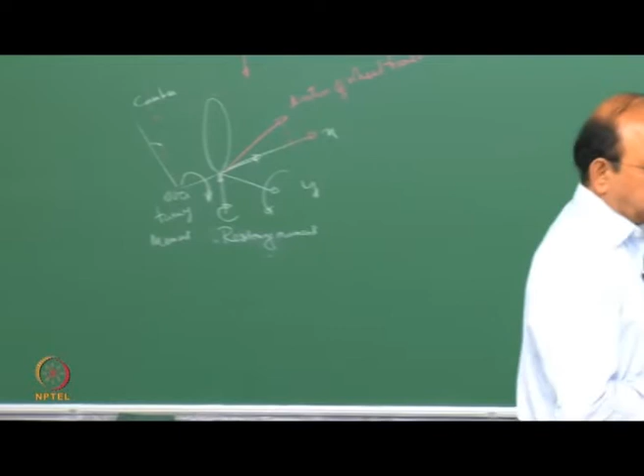In the last class, we were looking at the tractor trailer, and we were looking at braking. We also looked at how braking affects the performance, as well as the braking distances, and we saw how when a tire is locked, whether the front gets locked or the rear gets locked or the trailer gets locked, how that is going to have an effect on the vehicle motion. So we also gave a sequence on how it should be locked, and the braking forces or the percentage of braking forces which are distributed would depend upon the weights that are acting, as well as on this sequence which we said should take place. Without delving much into that tractor trailer, you have done some assignments, so that will give you an idea.

We will now move over to a very important and interesting topic on tires. So we will understand what are tires, and then we will go ahead and understand the mechanics of tires.

Mechanics of tires is a very interesting topic as well as a difficult topic. Though one would say, what is in a tire, I see this every day in every car. What's so important about tires? If you look at an automobile, there are two components which are extremely abused to the greatest extent. One is the tire, the other is the piston rings. Both of them are abused in the sense that they are subjected to all sorts of loads, friction, and so on in their lifetime.

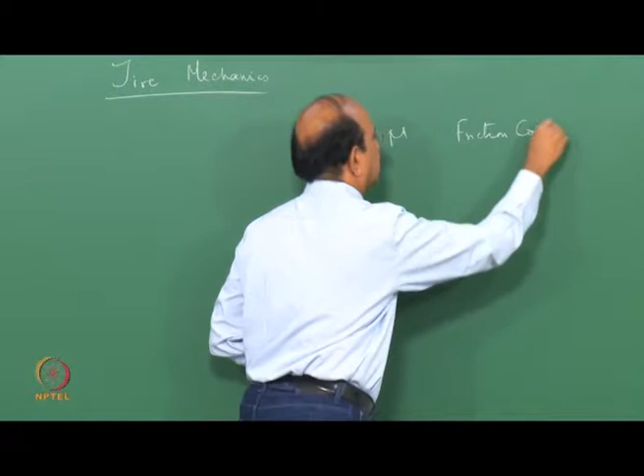In the last class, we said that we will dump all the effects that happen between the tire and the road into one constant, and we call this mu, and we said that this is the friction constant or friction coefficient. I put that within inverted commas, friction coefficient, because it is not as simple as what this equation says or what happens in just a block. So friction coefficient is only a simple equation to depict the relationship between the forces, but the phenomena is very deep.

We will answer the question one by one, as to why or how this friction coefficient or friction is developed, and how it enhances the grip, and so on.

Now, before we go further, let us look at just the forces that are acting on the tire. Since all of you know, you have done a course on automotive systems, you know what is a tire and so on. I'm not going to delve too deeply into the specs of the tire and so on, but we will maybe indicate this as we go along. We will not go into the construction of the tire and other aspects of materials, but we will suffice it to understand whatever is required. We will do that right now.

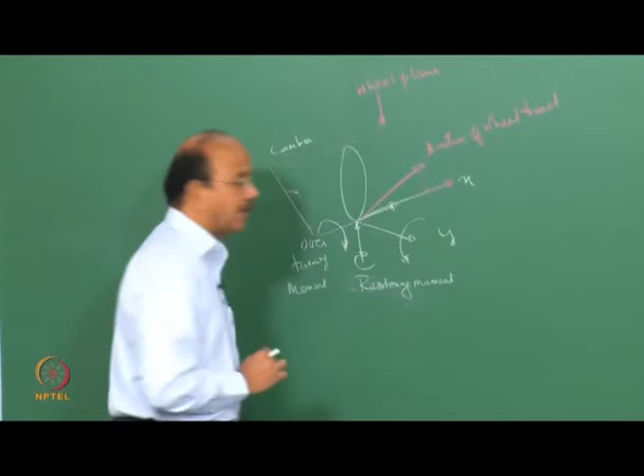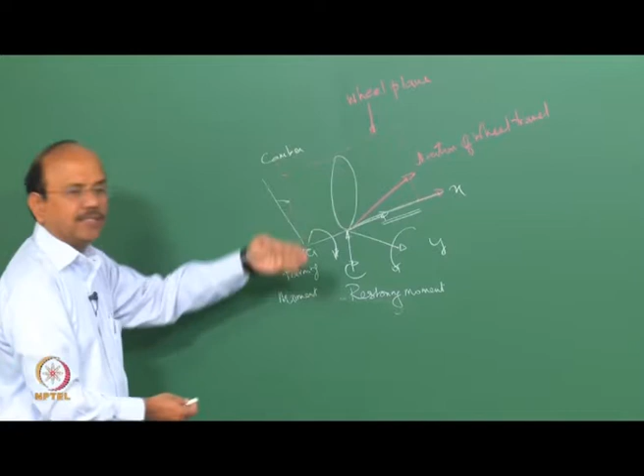So first, let us look at the forces that act on the tire. There is a longitudinal force, which is in the x direction, but that force is exactly not along the wheel plane. Suppose this is the wheel plane, then you would see that the tire direction of rolling or the travel is not exactly along that direction, but is at an angle, say let's call this lambda or alpha, and that angle is what is called the slip angle.

Why is it so? We will see that in a couple of lectures.

So the first thing is that it's very interesting to note that the tire, as it travels, doesn't go along the plane. Let's say that x direction is the direction perpendicular to the normal, or normal to the wheel plane. So in other words, the tire does not travel along the wheel plane. It takes a direction, and that is what I call the direction of wheel travel, and that direction is at an angle of alpha, or lambda, which is called the slip angle.

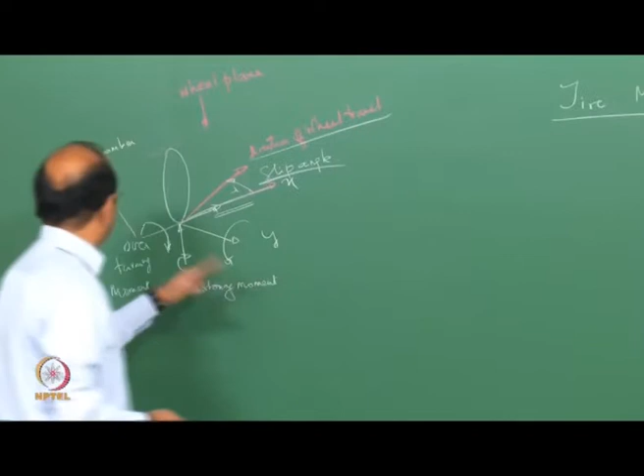That's the first thing. There are a number of forces, as well as moments, that act on the tire. Of course, there's a longitudinal force. We saw that the longitudinal force is along the x-axis, but we modified it by saying that whenever a tire travels, it may not travel along the x-axis.

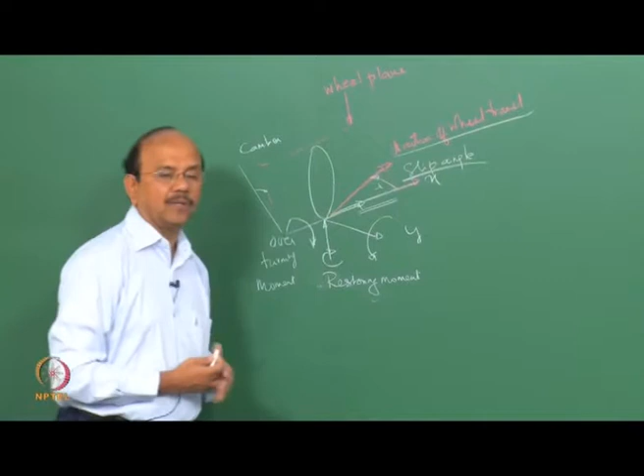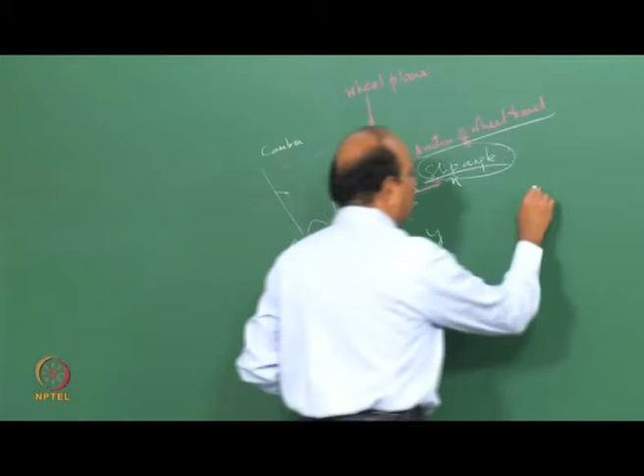Now the slip angle is necessary to generate what is called a lateral force. If the lateral force is zero, the slip angle becomes zero, and the vehicle or the tire travels along the x direction. So in other words, lateral force is developed because of the slip angle. So we have, let's call this the longitudinal force.

That is the Fx force, which is braking, acceleration, and so on. Then we have the lateral force,

which is Fy, which is the result of the slip angle. You would see that this is the result of what is called slip. We will define all these things carefully. The longitudinal force is the result of what is called slip. Very interesting, when there is slip, a longitudinal force is produced.

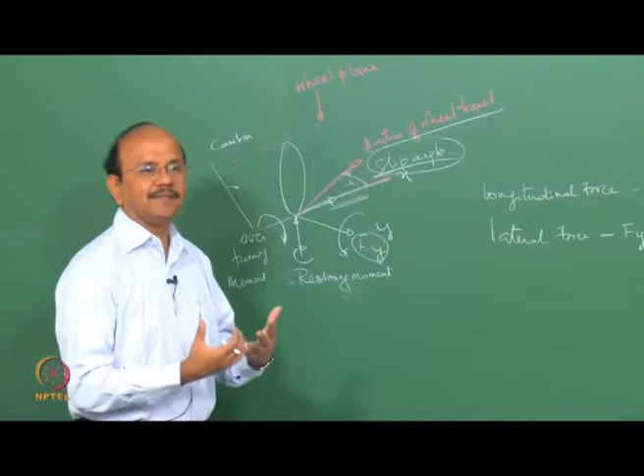When I say that, it really sounds like an oxymoron, that when you slip, there is a longitudinal force developed. How is that? That's what we are going to see. So there is a relationship between a longitudinal force and what is called slip. What is called slip? I'm going to define that carefully as we go along.

So we have a lateral force Fy, and that is due to what is called the slip angle. In other words, when the lateral force does not exist, the slip angle does not exist, and the direction of travel is along the x direction.

Then of course we have what is called the normal force, Fz, which is normal to the ground plane. That is the ground reaction, as we called it in the last class. All the directions have an accompanying moment.

Let's look at the Fx force. That Fx force is accompanied by what is called the overturning moment. I would call that Mx, and that is what is called the overturning moment.

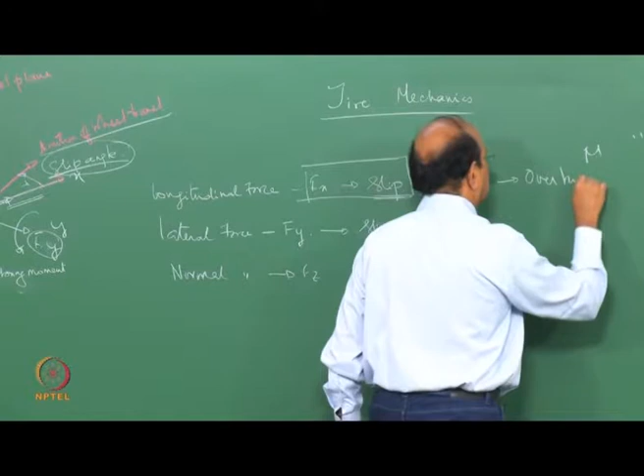You have a moment which acts along the z direction, which is called a restoring torque or a restoring moment. So here we have what is called the restoring torque or moment.

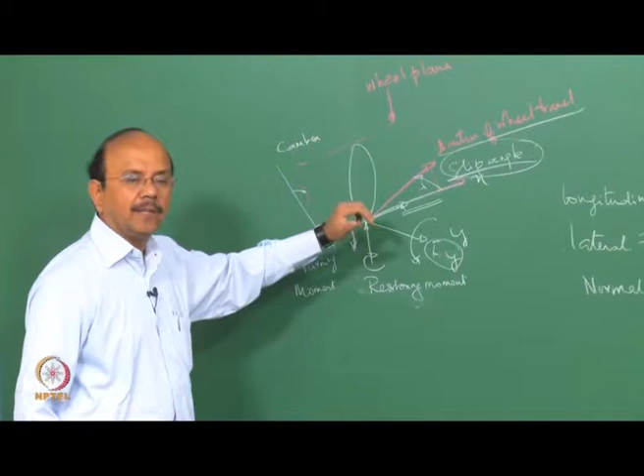And along the lateral direction there is a force as well as a moment, and the moment is nothing but the rolling resistance moment.

We said that moment or rolling resistance torque can be converted into a force that acts in the x direction. So we said that they are equivalent. You can't put both of them. So either there is a moment or there is a force. So when we analyze vehicle dynamics, the whole of the vehicle, then we replace the rolling resistance moment by means of a force in the x direction. This is what we saw in the last class, right?

So these are the things that happen in a tire. The question is, how is it developed? What is the mechanism of this development of these forces? That's what we are going to see.

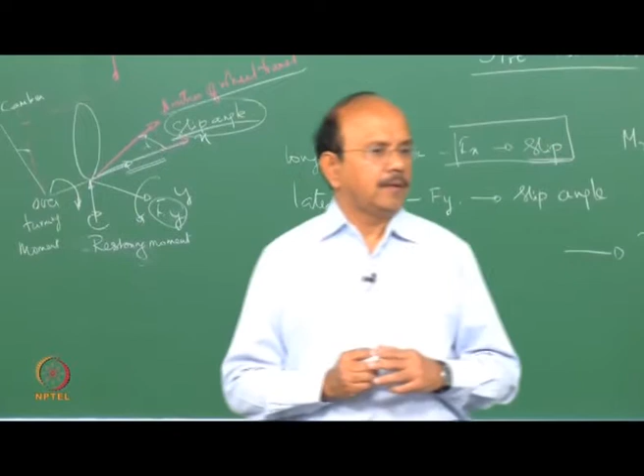All of you know how a tire is specified. If you go to a shop to buy a tire, say you are buying a passenger car tire, you would specify, say, 215, then 55 or 65, then R, and then another number, 15. This is what usually you would specify, right?

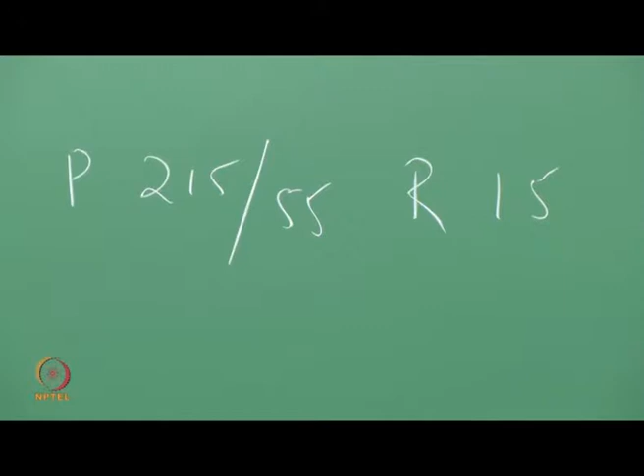Sometimes you would go ahead and specify a number and a letter. Each one of them has a meaning. P is the passenger car tire. 215 is the biggest section width of unloaded tire.

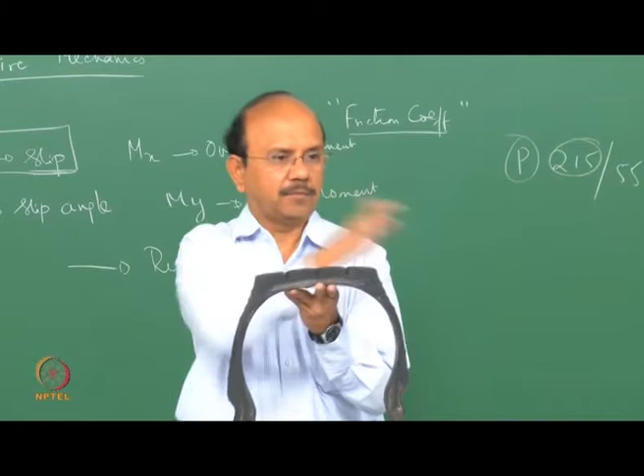Let's look at a section of the tire. So that's a section of the tire. This distance, the maximum distance or maximum width, is called the section width. So you specify that section width. Note that the section width is specified in terms of mm, millimeter.

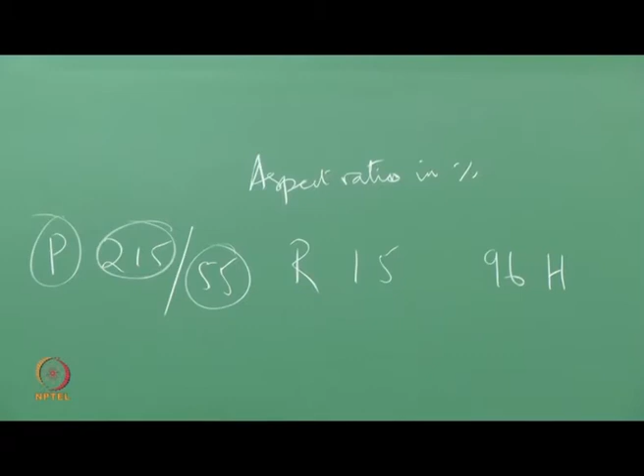Then you have 40, 55, 45, 65, whatever it is. That is what is called the aspect ratio, and it is in percentage. What is the ratio when we say aspect ratio? The ratio of the height here, this height, which I would call HT, to the section width.

So if I have a tire like this, then that is the section width, then that is the height. The ratio of the height to section width multiplied by 100, that is what is called the aspect ratio in percentage.

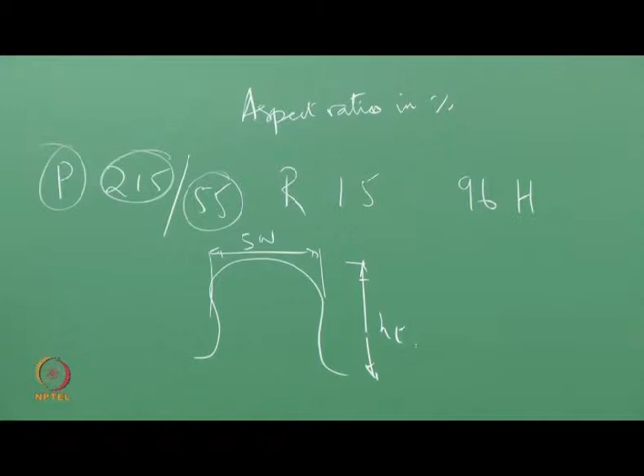Lower the aspect ratio, it's called a low aspect ratio tire. They're colloquially called low aspect ratio tires. 35 is a very low aspect ratio tire. In fact, if you see today many of the high-end cars, you would notice that this height is very small. These are low aspect ratio tires.

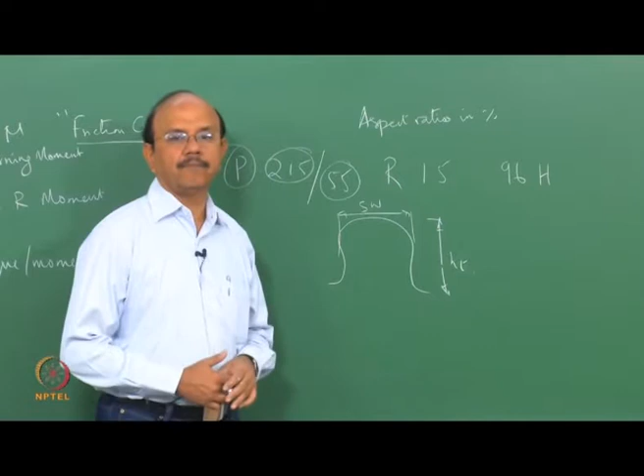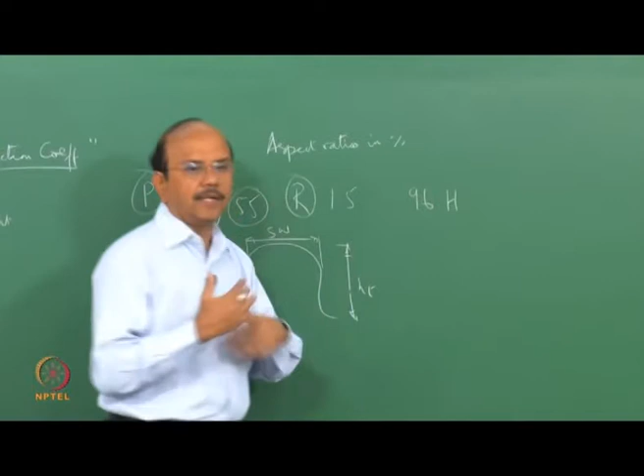R is what is called the radial tire. Today almost all passenger car tires are radial tires. We still have tires which are not radial in the truck segment, and that depends upon the countries. For example, in North America, 90% or 95% of the tires or even more are radial tires. But in a country like India, maybe about 25% of the tires are radial, and radialization is going on, where bias tires are converted into radial tires. We will see what is a bias tire and what is a radial tire again in the next class through some pictures. We will just note that two types of tires are there.

One is a radial tire and another is a bias tire. We'll just quickly see a section and see what is the radial tire, but we will go from micro up, from micro to macro.

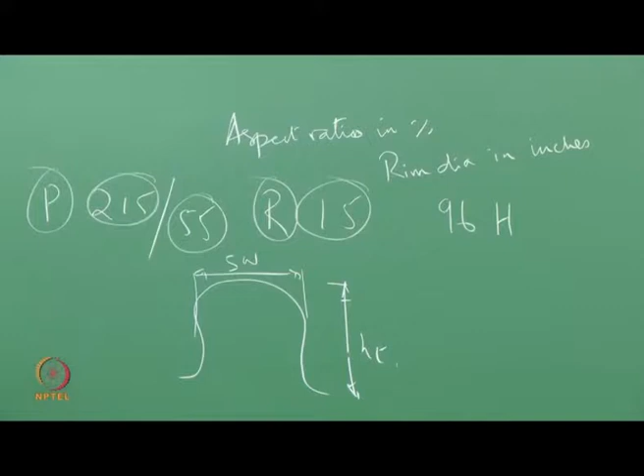Now, 15 is the rim diameter in inches. Due to some peculiar history or legacy, you have millimeters combined with inches when you specify a tire. Then you have a load rating. You have a table from which you can find out the load rating of the tire. And then you have what is called the speed rating. So you have a load rating and a speed rating.

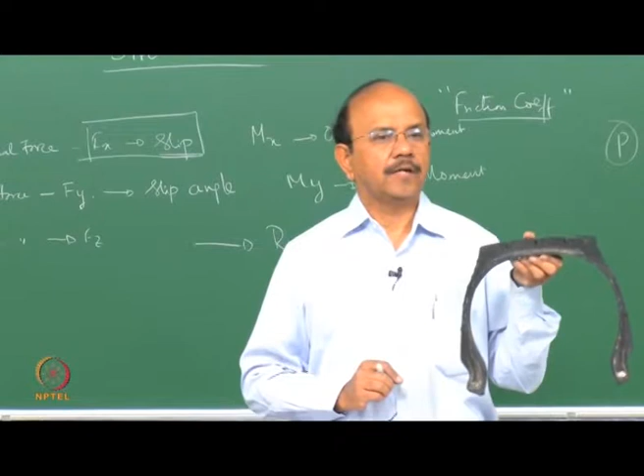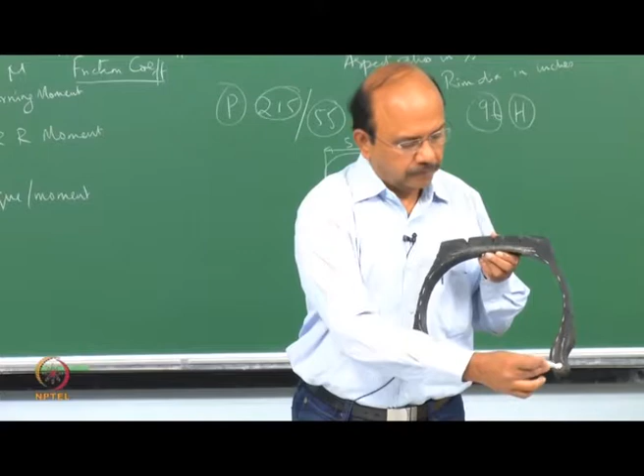A quick look at the section before we go further and explain the micros. That's a typical cut section of a truck tire, courtesy JK Tires, one of the leading manufacturers. We have a section of their tires. You would notice that there are a number of reinforcements, and these reinforcements in this tire are made up of steel. You would also notice there are chunks of steel on either side, that's what is called a bead. So the rim is here. The tire sits on this rim, and it is inflated.

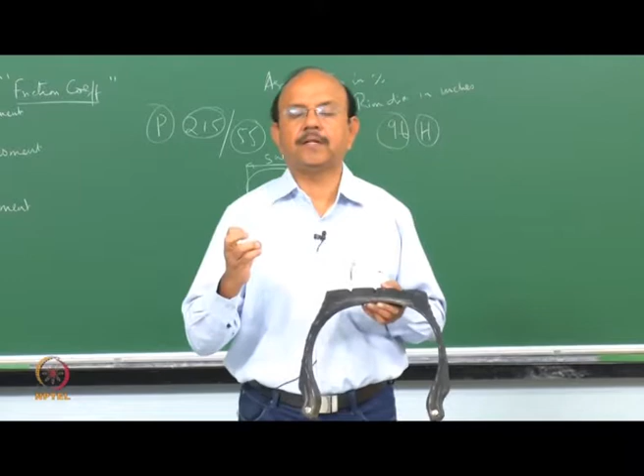So there are a number of parts of these tires. We will explain that in the next class. We will go into the details of what is the material with which this tire is made, how it works, and then we will look at the different parts of the tires. The way the reinforcement is done, first of all, it's not pure rubber, it has reinforcements. The way reinforcements are done, the tires are classified either as a radial tire or what is called a bias tire.

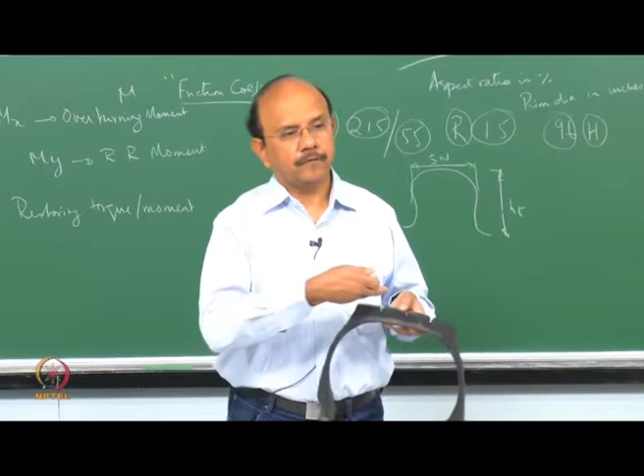Though you see that they are all steel radials, it is not necessary that all the reinforcements are made up of steel. Some of the reinforcements you see here, which is called the ply, the reinforcements which come here, a section of which we will see in the next class, is made up of polyester materials, and the belt, as it is called, these reinforcements are made up of steel. So in other words, you can have a combination of materials which can reinforce this. The reinforcements are basically made up of steel, nylon, polyester, rayon, and so on.

Before we delve deeply into the tire per se, we will go from the material of the tire to the construction of the tire, just to give you a background. So let's now look at what are the materials and how does it behave.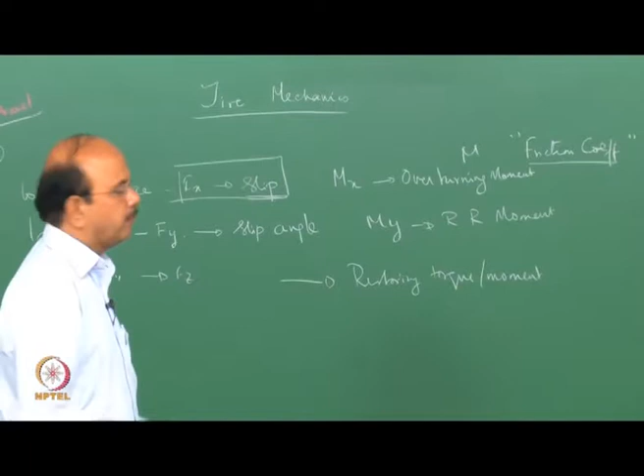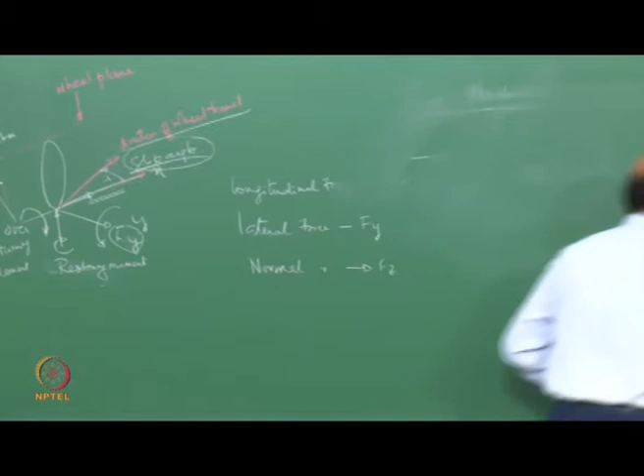All the tires used in the automobile basically consist of what are called elastomers. Of course, tires are classified into pneumatic tires, which we use all the time, or solid tires, non-pneumatic tires, which have very specific applications. But in this course, we are going to only see pneumatic tires. The first thing is that we should understand elastomers and how they help the tires develop the forces that are required for it to accelerate, brake, take a corner, or maneuver, and so on.

We will go into small bits of information which we will collate together in order to understand how a tire interacts with the road. In other words, we will understand the elastomer, we will understand the road, then we will understand how these two talk to each other in order to develop the forces that are required.

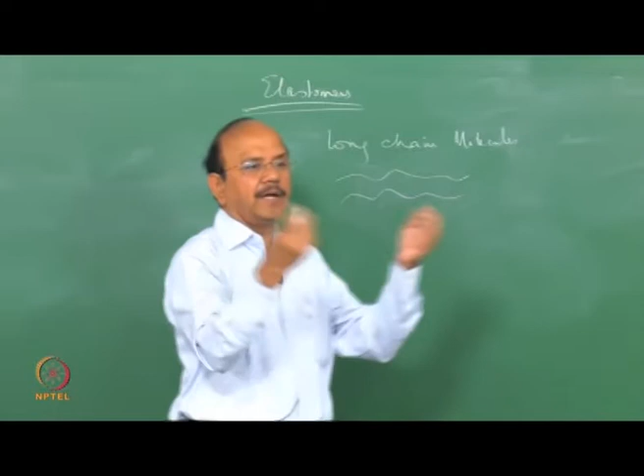Now, what are these elastomers? The elastomers are basically long chain molecules. Now these long chain molecules are vulcanized through what are called sulfur bonds. In other words, these long chain molecules do not exist independently. They are not one long chain molecule like this, another like that. These long chain molecules are bonded by what are called sulfur bonds, and that's what we call vulcanization. Now, if you leave this long chain molecule, what happens? It becomes something like a bundle of twine or wool or something like that.

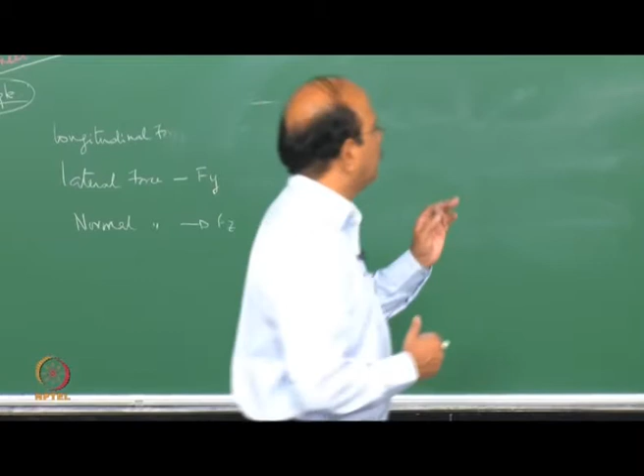It's very interesting to note how molecules behave independently, and how that is different in their behavior when it comes to molecular environments with other molecules. In other words, it is interesting to know the difference between how one molecule behaves versus how a number of molecules or molecular chains behave. Now, if you look at one molecule...

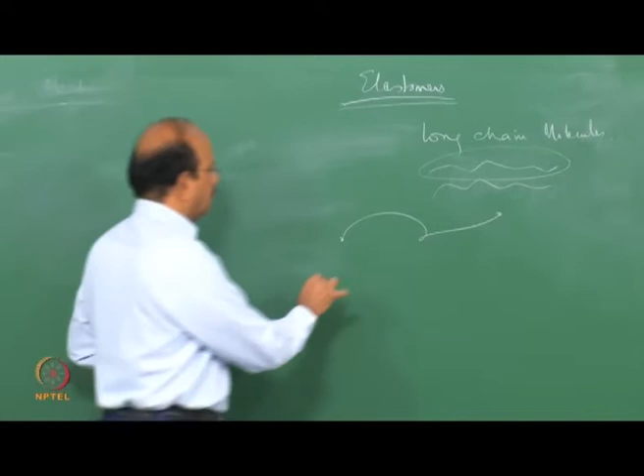Let's say I take these two points and stretch it. When I stretch it, the length increases. Note that this is the original length. Now, when I stretch it, that's the final length. The first point to notice is that this stretching is different from the stretching you would notice in a metal. For example, if you look at steel...

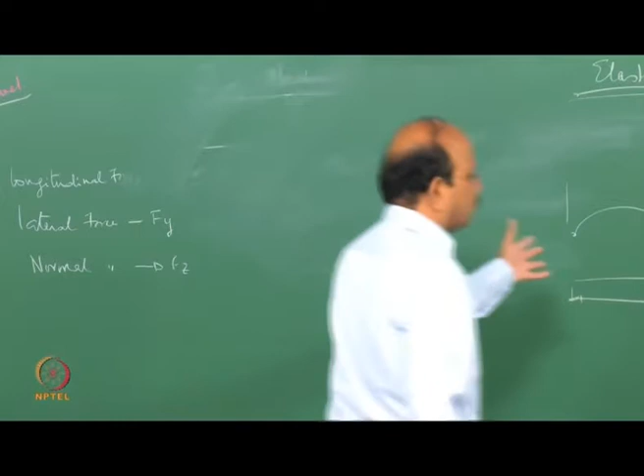Steel does not have molecules like this, obviously, and the elastic behavior of steel is due to what is called lattice deformations.

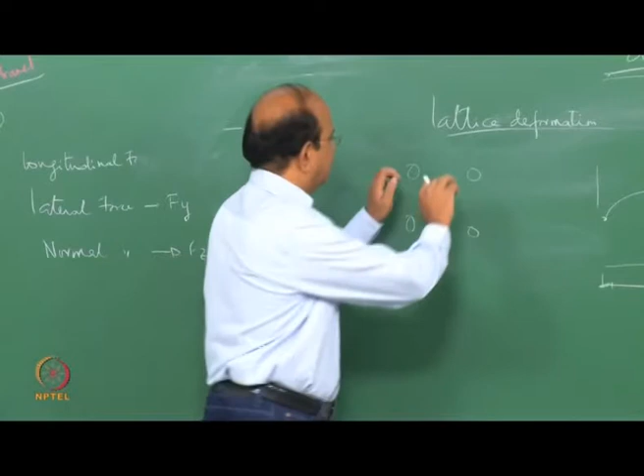Depending upon the type of steel, or the type of structure of the steel, let's say it's FCC or BCC if it's austenite, and so on. Now, when you subject the steel to a force, the lattice gets deformed, and that's what we call lattice deformation. When we remove the force, the lattice goes back to its original position. So lattice distortions or deformations are responsible for the elastic forces developed in steel.

You also know that plastic deformations are due to a phenomena called slip, and slip is due to the presence of dislocations and so on.

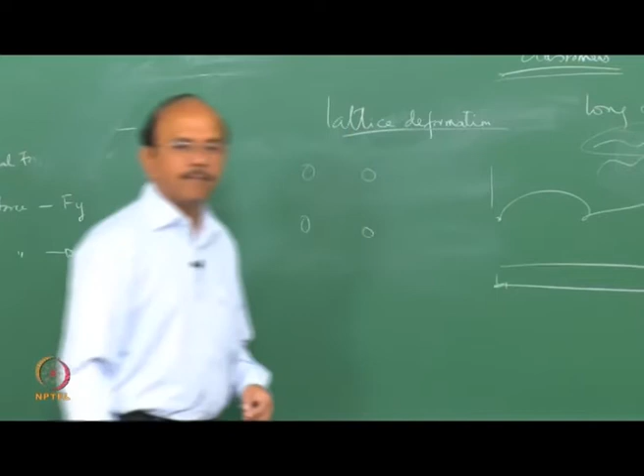Look at this. So you have a wire, say for example, if you take the mouse, let's say this is the length from my left hand to right hand, this is the length of this long chain molecule as you see it outside. So now let's see what happens. When I stretch it, look at how much I'm able to stretch, look at how much my hand moves. Actually, I am not disturbing the bonds like what I did in the previous case.

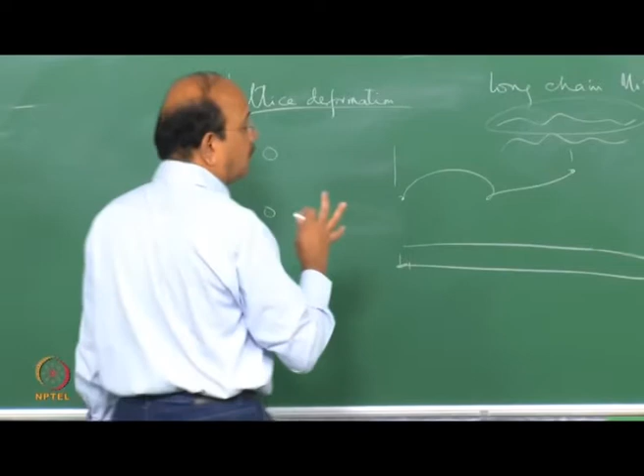What I did was to straighten this out. Look at that difference. So the phenomena of deformation of an elastomer is different from that of steel, and the phenomena is controlled by our good old entropy.

By entropy. Now you can imagine the entropy, which you normally understand it to be what? Higher the entropy, you would imagine a very simple way of understanding entropy is that higher entropy means there's more chaos, more disorder, and so on and so forth. This is what you roughly understand, let's forget about the mathematics.

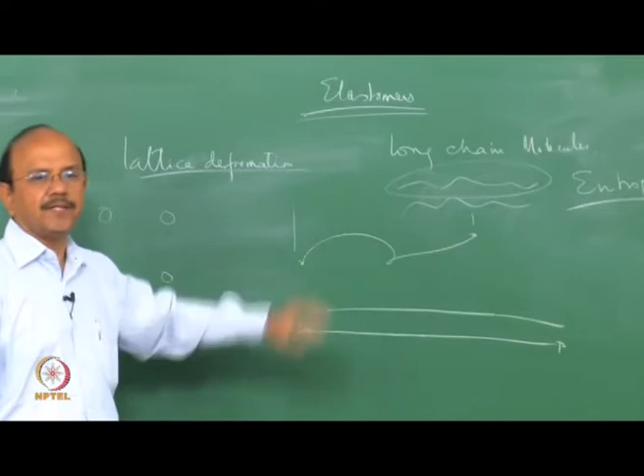Here we say that it is the configuration which decides the entropy. When it becomes straight, the number of configurations that this macromolecule can take is limited, and so the entropy actually drops. So when I leave it, the entropy actually increases, and it goes back to this position. In other words, there is an entropy change that is responsible for the deformation of these macromolecules.

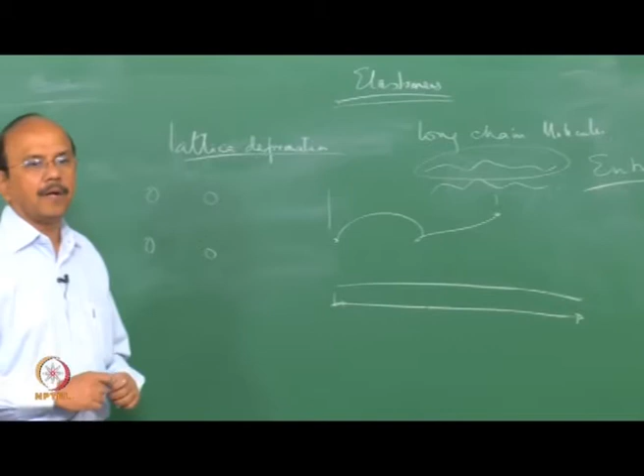So at one level, you can imagine these molecules are like a spring. You can say I will fix it here, I will pull it, when I pull it, it becomes like this, and then when I leave it, it goes back to this position.

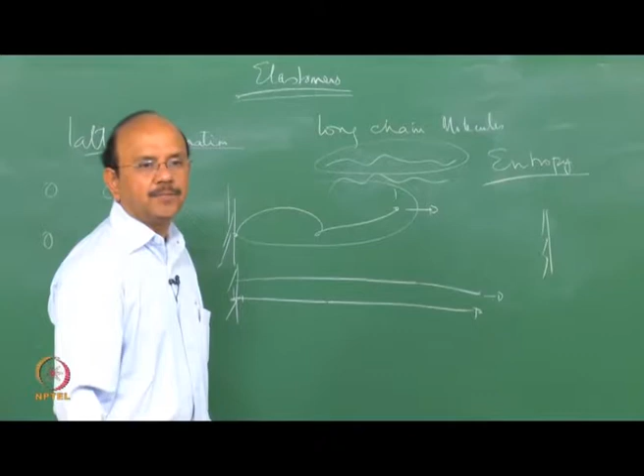You can imagine the same situation when you have these springs which are bonded by sulfur. So if I have a spring bonded by a sulfur here, a spring bonded by sulfur here, this spring bonded by sulfur, this spring bonded by sulfur, and so on. This keeps increasing, and so you apply a force, and a similar thing happens.

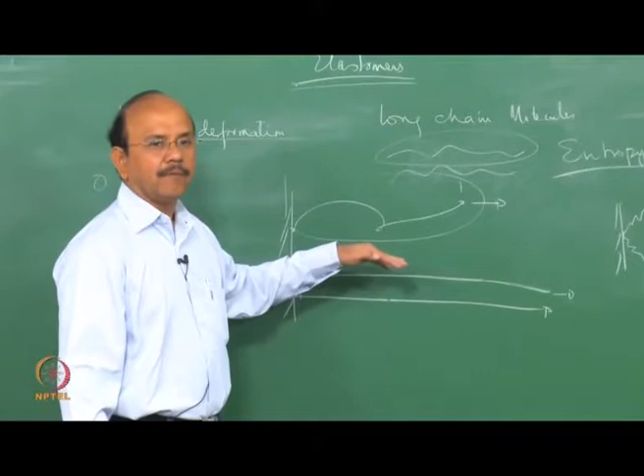So on one hand, this can be modeled as a spring. But don't forget that there are long chain molecules, though they are bonded, they are not arranged happily like that. So when they are pulled, these long chain molecules start interacting with one another or with itself and so on. In other words, the long chain molecules have, let's say, some sort of friction. It's actually not a friction, but you can say it's some sort of friction between the other molecules.

So when I pull it, they also interact with other ones, and that gives a very interesting effect, which is the viscous effect or the dashpot effect.

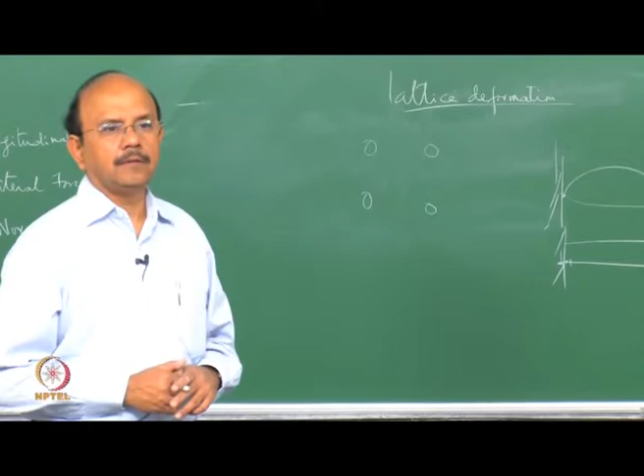You can for a moment imagine that these molecules are in a tube. This is called the tube model, where the elastomer consists of a number of tubes into which these molecules are placed. These tubes start interacting with one another as the chain moves through them.

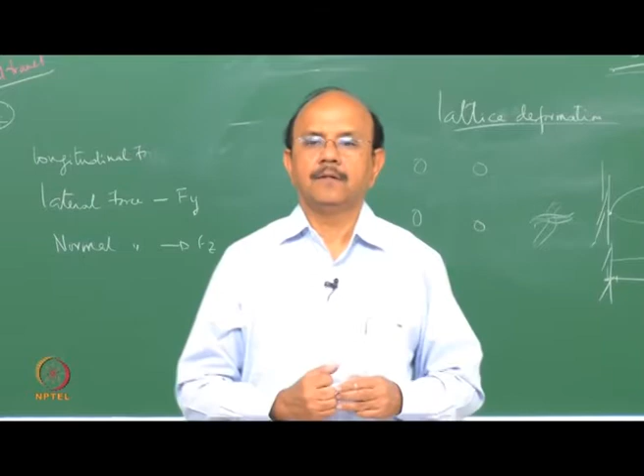Because of this interaction, there is a viscous part. Two factors become important in their interaction: one is what is called frequency, and the other is temperature. Interestingly, the mechanisms are similar, and hence there is a relationship between the two.

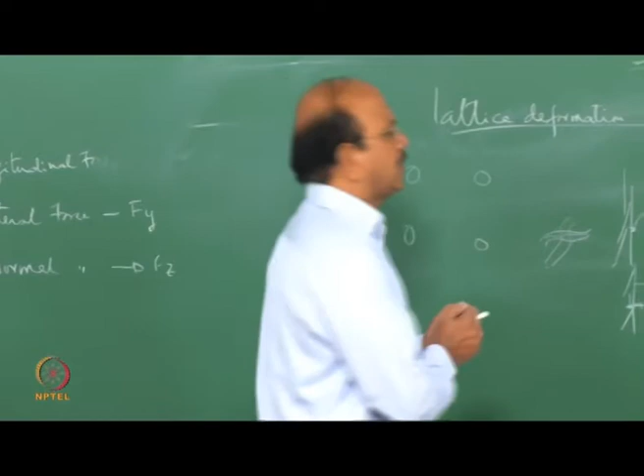What do I mean by frequency? Frequency tells me how fast I am going to pull and release. I can do that slowly, say 1 cycle per second, 10 cycles per second, or I can do it in a very fast fashion, even at 10 to the power of 8 or 10 cycles per second. Now what is the effect of this frequency on the mechanism we indicated, that there are interactions?

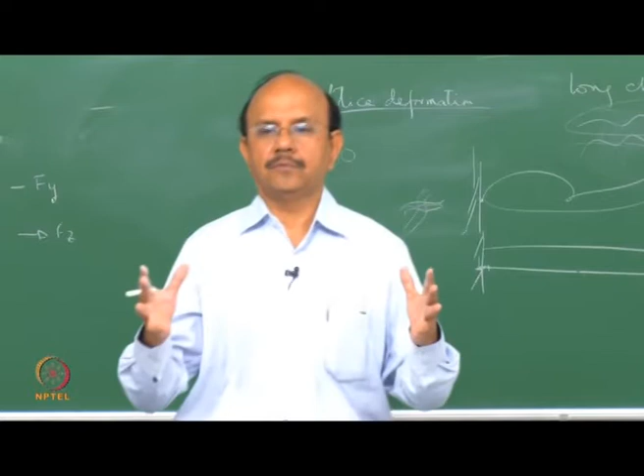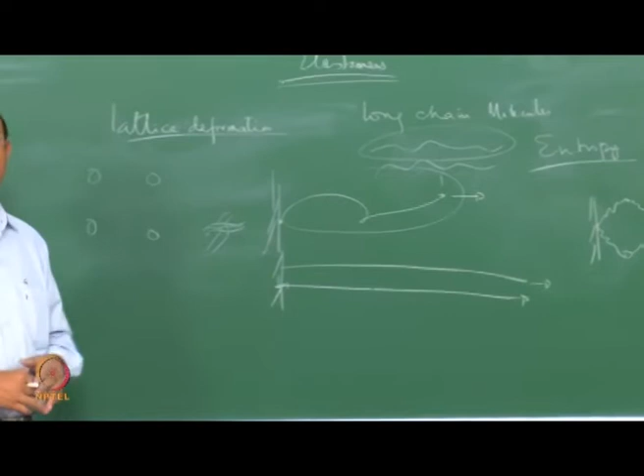At very low frequency, since we had put in a viscous effect, meaning velocity plays a role, when you apply the force the chain has time to react to that force, and hence reacts almost in the same fashion as applied. Since you release the force again slowly, it has time to react and come back to its original position. So at low frequencies, the time available is quite large, and the molecules have the ability to expand and then come back.

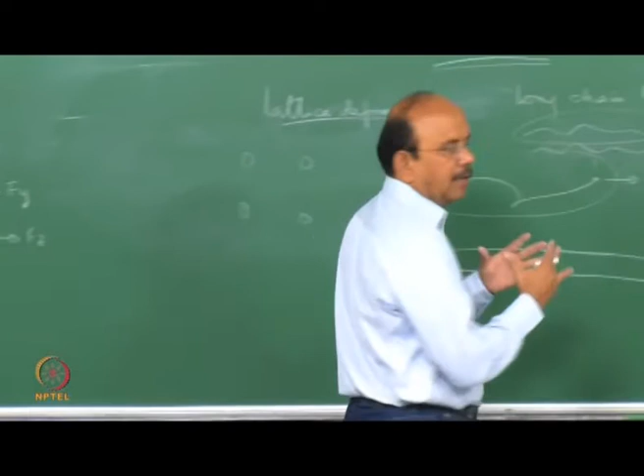In other words, at low frequencies, it behaves something like a spring, and all the forces are dumped into the spring. For a simple model, the force here is kx, where x is the displacement, and for a dashpot it is always c times x-dot. So the forces that act are able to get back - the whole rubber behaves like a spring.

What happens when I increase it? Let's look at the other end of the spectrum, where I'm applying the force at a very high frequency. Then the material does not have time to get back to its original shape, because by the time it gets back, you have applied the force again. It's a viscous effect, as we said.

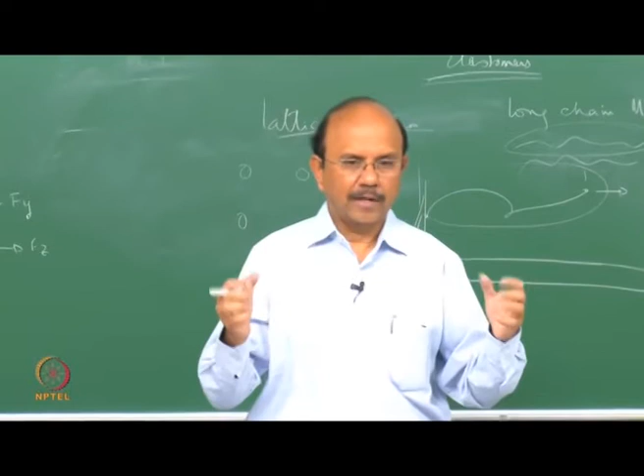So what happens? It would behave like a very stiff material, because when you want to release it, it doesn't come back, and when you apply it again, it won't go back again. So it becomes very, very stiff at high frequency. In between the two, at very low frequency it's a nice spring because it has enough time to recover, and at very high frequency it doesn't have time at all, hence it becomes very stiff. In between, it has both a spring and a dashpot effect.

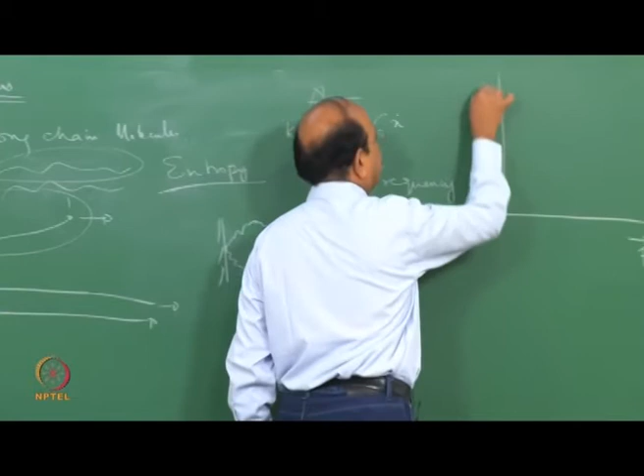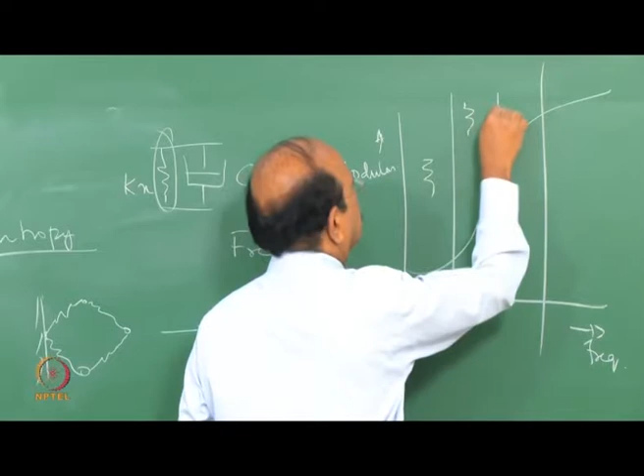So if I now plot frequency versus what we call stiffness, or modulus, how would it be? It would look like this. Here is the spring region. Here both effects are present, the spring and the dashpot. And here it is quite rigid.

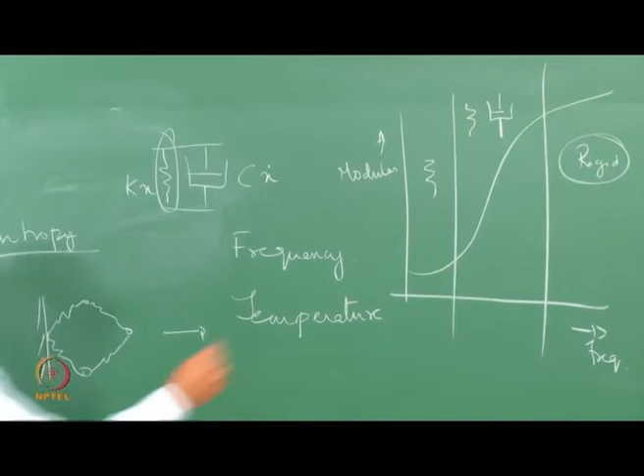So these are the three effects. To summarize: at low frequency, the time required is good enough for the rubber molecules to come back, so they act as springs. At higher frequencies, they don't have time, and hence they become rigid. Our region of interest in this whole thing is this middle region.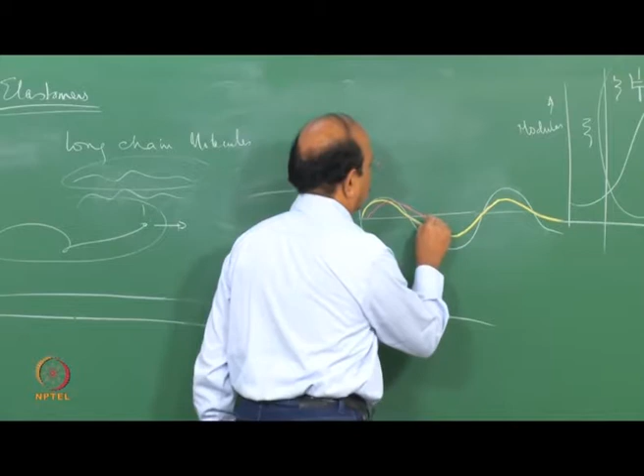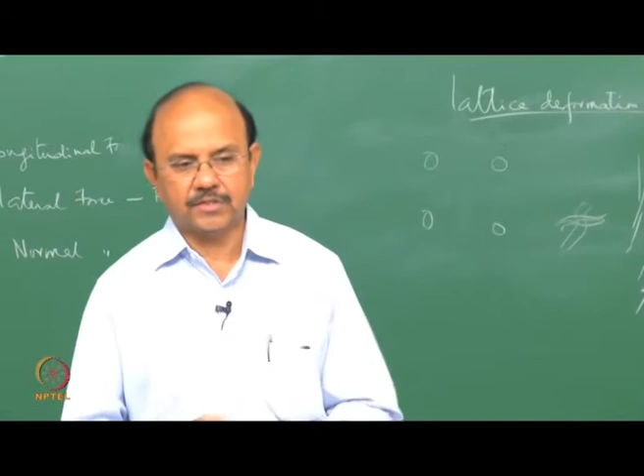If I now plot a stress-strain curve for that region of interest, which I would call the viscoelastic region, how would it look? Let's say I apply the stress like this - then the strains do not follow the stress. If it were an elastic material like steel, the strain would follow directly, with the ratio being the Young's modulus. On the other hand, in this material, because of the viscous effect, there is a time delay between the stress and the strain - in other words, a phase lag between the stress and the strain.

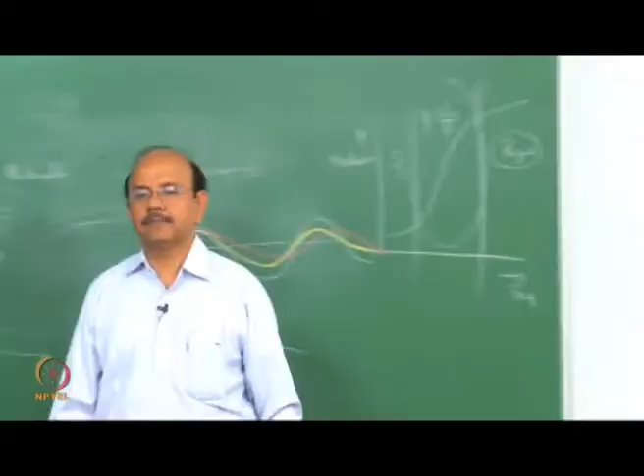Now let us look at the effect of temperature and then get back to this again. The temperature has just the opposite effect. When the temperature is high, it aids these molecules. So let's say I'm fixing the frequency and taking the temperature to be high. What would happen? When the temperature is high, it aids in the recovery of these molecules to its original shape, and hence it would behave as if you are at a low frequency.

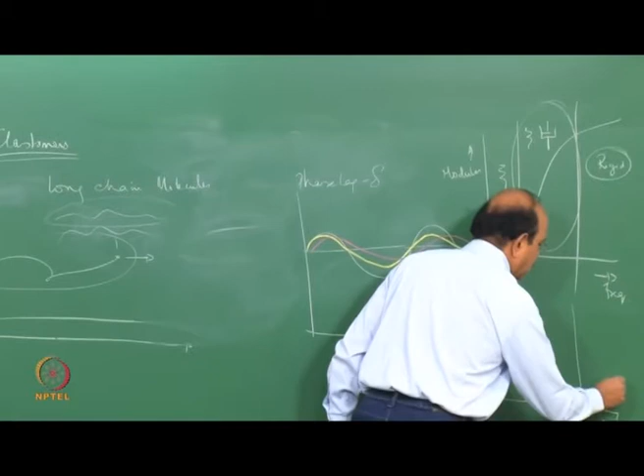So if I now plot the temperature, at high temperatures, since it aids the molecules to recover, the modulus would be something like this. At very low temperatures, what would happen? Just the opposite. The molecules are under difficulty to get back to its original position, so the modulus is high. At intermediate temperatures, the modulus is between the two.

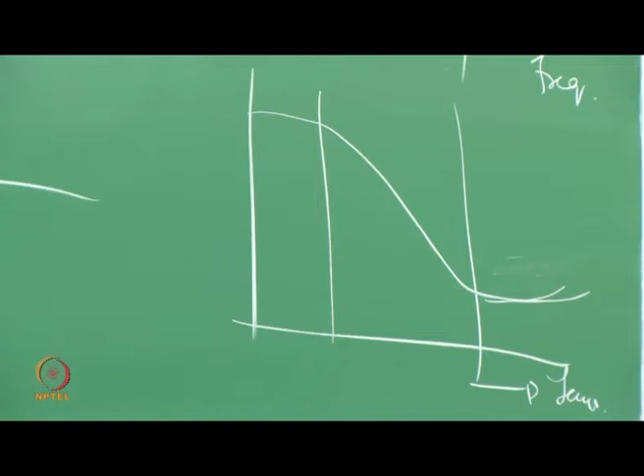So if you compare this graph with this, you would notice that the temperature effect is the inverse of the frequency effect. We will see that there is a relationship between the two, which is called the WLF relationship.

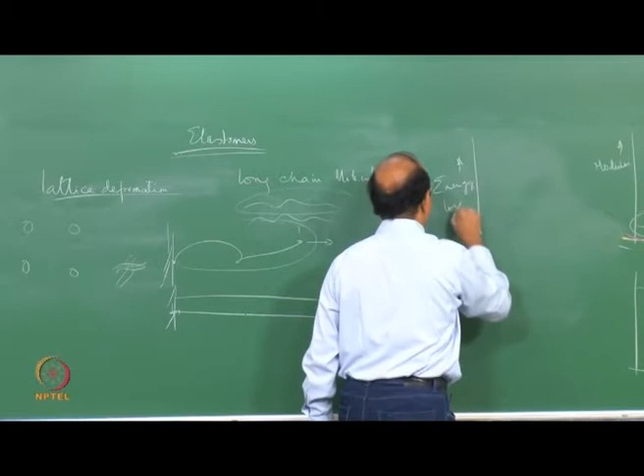Now, if I plot for that frequency effect, let's say the energy loss versus the frequency, then the curve would look something like that. There is a central region at which the energy loss is high. That's that region, and that's the region at which we are going to use our tires.

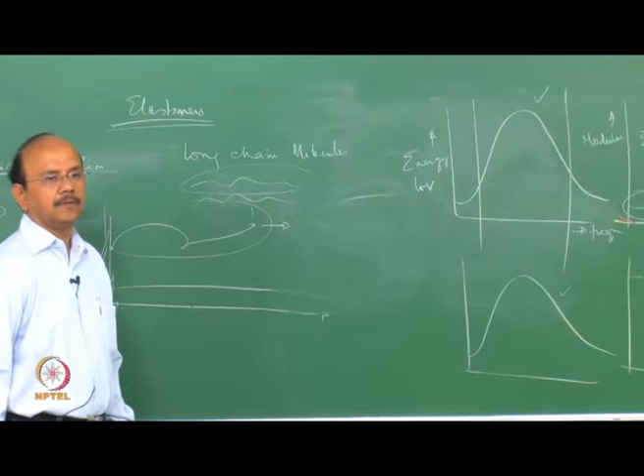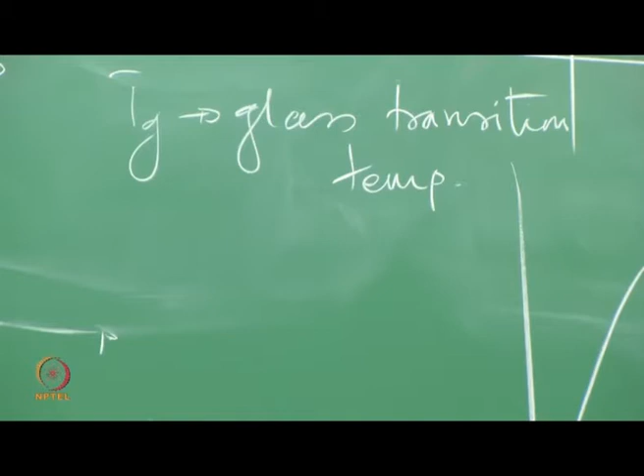The same case, temperatures would also look something like this. So the temperature also would have the same type of behavior. There is one particular temperature of interest which is called the glass transition temperature, popularly denoted by Tg. Below Tg the material is vitreous, and above Tg the material becomes very soft.

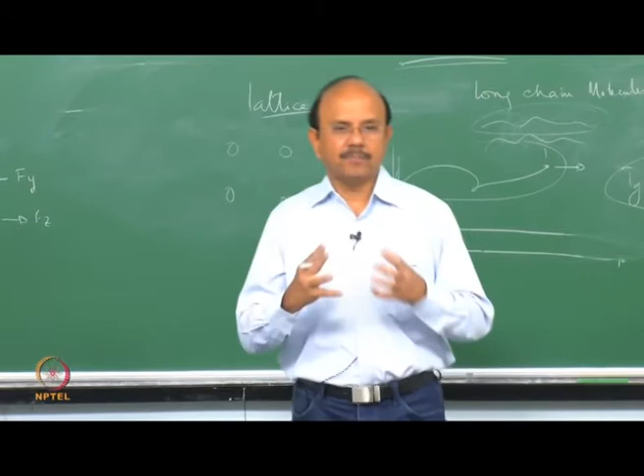The glass transition temperature would obviously depend upon the frequency, because both of them have an effect. In other words, if I do a test at one frequency at a temperature, and I now do the same frequency at another temperature, the effects would be different. Vice versa, if I do a test at one temperature with two frequencies, again the effect would be different. So there is an interaction between these two — an equivalence between the frequency and the temperature, and the equivalence is inverse.

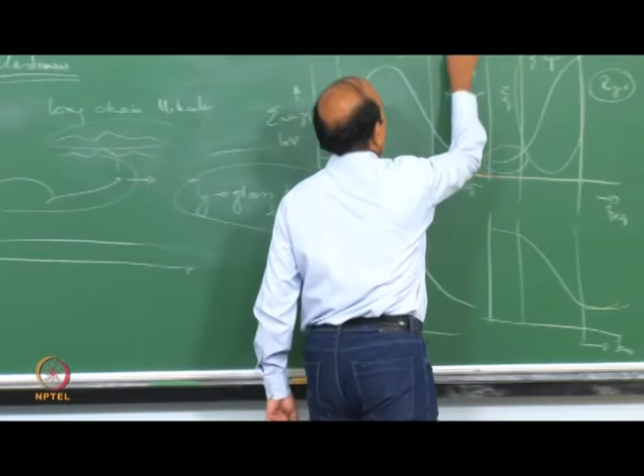It is usually said that when the frequency increases by a factor of 10, there would be a change of temperature of about 7 to 8 degrees. When I increase the frequency, would the temperature increase or decrease? Decrease. So you go this side in frequency, you would come the other side in the case of temperature. There are equations for this, given by Williams, Landel and Ferry — the WLF equations. We will not go into the details, but we will understand this more physically.

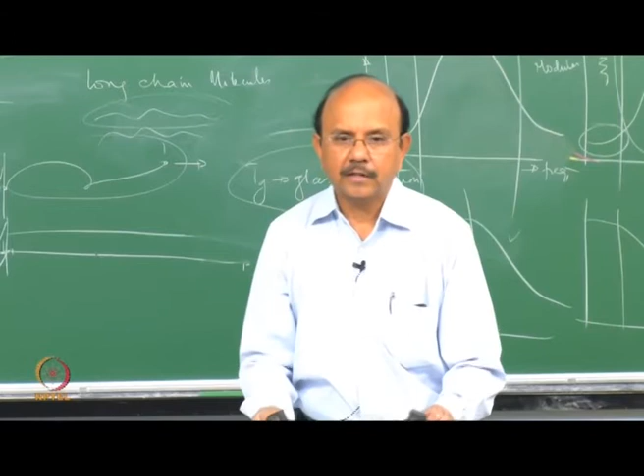Now, why are we talking about this? How does the behavior of elastomer help in the development of grip? That's the first question we are going to answer. In other words, let's define what is meant by grip. We are now going to go into the micro level — that's the section, let's say that this is the tire. We are going to sit at the interface between the rubber and the road and understand how this concept applies in that circumstance.

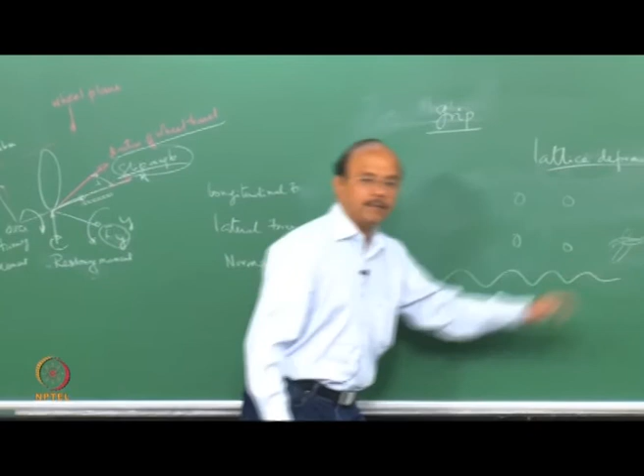One of the things we know about the road is that it has undulations. These undulations can be looked at from a macro viewpoint, or from a micro viewpoint. How does this rubber interact with the road is our next question, given that we have these two kinds of roughness. That we will see in the next class.